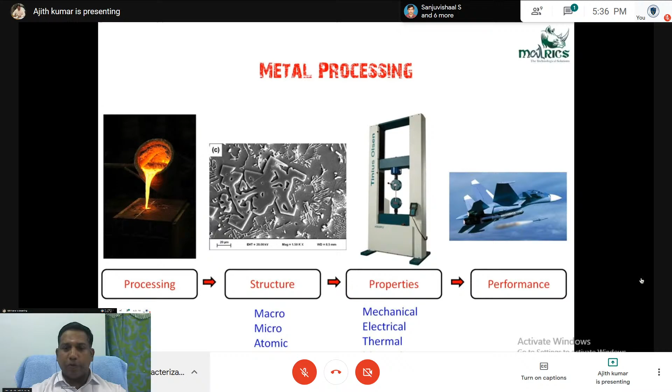And for the example or case study purpose, I'm using some of my PhD work and some of my papers' work in this entire talk.

We can classify materials into three categories: metal, ceramic, and polymer. A composite is composed of two or more individual materials from categories like metal, ceramic, or polymer. If you add some ceramic particle into the metal matrix, we call it metal matrix composite or MMC. Adding metal particle to a ceramic matrix gives a ceramic matrix composite. Some researchers add a small amount of metal powder to polymer, and that kind of composite is called polymer matrix composite. So by changing the combination, we are changing the matrix composite.

Metals, in the periodic table, about 76 of them are metals. If you define metal, it will vary with respect to the profession. A chemist calls an element a metal if its oxide dissolved in water gives an alkaline solution.

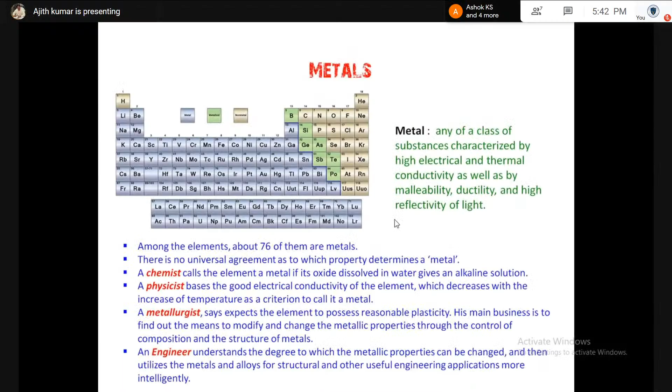So, defining a metal, it will vary with respect to different profession. A physicist bases it on how good the electrical conductivity of the element is, which decreases with increase of temperature as a criterion to call it a metal. Metallurgists say if you add some element or particles, how the material properties or metallic property is changing, how we are controlling the composition, that is called metal. But from the engineer's point of view, it's how we are utilizing that substance or product.

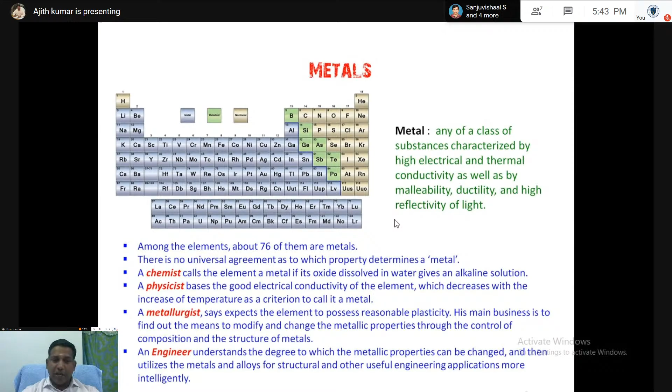And what it is made up of. So he always thinks about what is the use of that, what is its property. With respect to its property, he calls it metal or something.

So in general, metal is any class of substance characterized by high electrical and thermal conductivity, as well as by malleability, ductility, and high reflection of light.

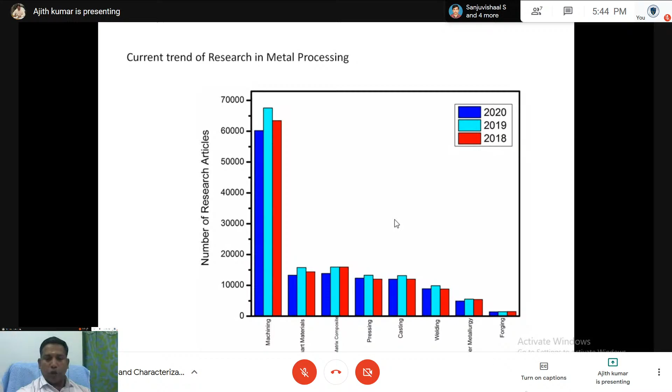And in processing wise - machining, smart materials, metal matrix composite, pressing, casting, welding, powder metallurgy, or forging - about 10,000 high-end impact factor papers are coming every year. So the research ground is open to all researchers, and moreover in the casting area, about 12,000 papers are coming every year.

So we can classify metal into two different categories: one is alloy, another one is composite. Alloy is a metallic solid formed by an intimate combination of a metal with one or more other metals or non-metals, but it has metallic properties. Composite is a material with at least two constituent parts, one being a metal necessarily, the other material may be a different metal or another material like ceramic or intermetallic material.

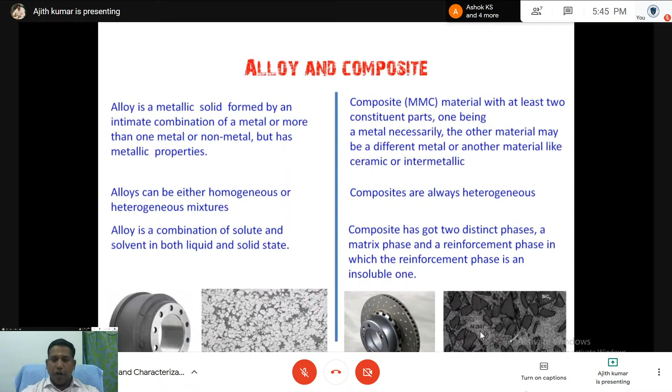Then we can classify metal into two different categories: ferrous and non-ferrous. Ferrous means the main constituent of the material is ferrite or iron. In non-ferrous, something other than ferrite is the main constituent, then we call it non-ferrous metal. So ferrous we can classify into two categories: steel and cast iron.

Steel we can classify into two categories: low alloy steel and high alloy steel. In low alloy steel, there is low carbon, medium carbon, and high carbon steel. The high alloy steel we can classify as tool steel and stainless steel. Stainless steel has about 11% chromium. In the case of cast iron, we can classify into gray cast iron, ductile cast iron, white cast iron, malleable cast iron, and compacted graphite cast iron.

On the other side, non-ferrous alloys - that means if ferrite is not the main constituent, we call it non-ferrous alloys. Aluminum alloy, copper alloy, magnesium alloy, titanium alloy, refractory metals, super alloys, noble metals, nickel alloys, lead alloys, tin, zinc, and zirconium alloys - these are all the different non-ferrous alloys.

Again, if you come into metal matrix composite, we can classify into two major categories: ex situ composite and in situ composite. We know composite is a material with at least two constituent parts, one being a metal. In ex situ composite, we are adding the reinforcement externally - that means adding silicon carbide particle, boron carbide particle, or titanium carbide particle to the aluminum matrix.

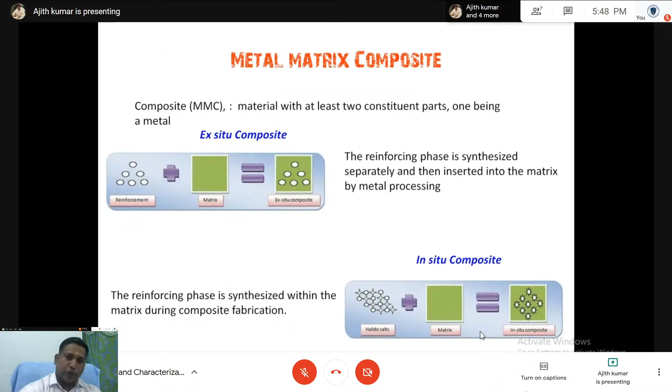We can classify composites into four different categories: particle reinforced composite, fiber reinforced composite, structural reinforced composite, and nano composite. We classify these with respect to the reinforcement.

The particle reinforced composite first type is dispersion strengthened composite, meaning nano size or submicron size particles are added to the metal matrix, improving strength and creep properties depending on the composition of metal and reinforcement. If larger particles, more than 500 micrometers, are added to the metal, we call it large particle reinforced metal matrix composite.

Fiber composites can be classified into two categories: continuous aligned and discontinuous aligned. Continuous aligned means the reinforcement runs through the entire product as a continuous rod. In the discontinuous type, like flakes, there is discontinuous aligned and randomly oriented composites.

The structural type is a laminated composite, mostly used in polymer-based composites, though some metal matrix composites are also made in laminated and sandwich panel types.

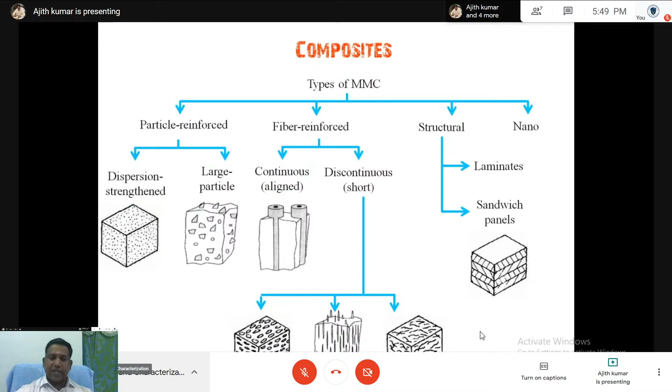Nano composite means the particle size is nano scale, so we call it nano composite. If you look at any composite, the main factor is the interface.

How the reinforcement and matrix are added together or bonded is called the interface. There is always an interface between the constituent phases in a composite material, and for the composite to operate effectively, the phases must bond where they join at the interface.

By experience we understand this, so sometimes we add a reactive agent to the matrix or reinforcement, creating a third ingredient to bond the reinforcement and matrix. That is the second type of interface.

The third type is when particles are added to the matrix and, either in situ or through reaction, interfaces form surrounding the particle. That is the third type of interface.

The interface strength and bonding always affects how the material property varies. Comparing composite and metal in terms of toughness, formability, joinability, and corrosion resistance, the metal is high but its strength is low compared with ceramic. So if we want to improve strength or high temperature withstanding properties, we add ceramic particles to the metal, altering the property to a higher level as per our need.

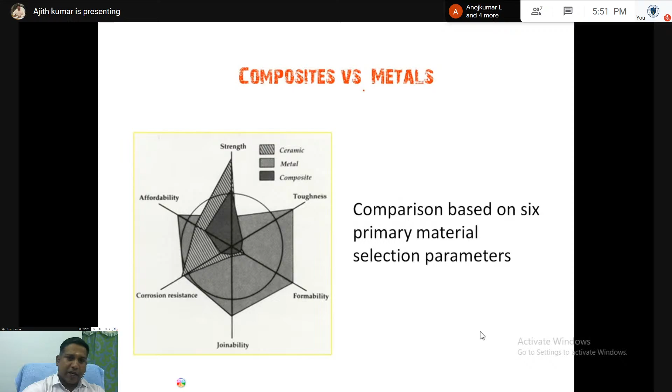Now an important concept: alloying. Pure metal generally gives less strength with high ductility, so if we want to improve properties as per our performance requirements, we do alloying. Alloying is a process in which two or more metal elements are melted together in precise combinations to form a specific material called an alloy.

Generally, we can perform alloying through metal casting and powder metallurgy, which is what we are going to see in this session.

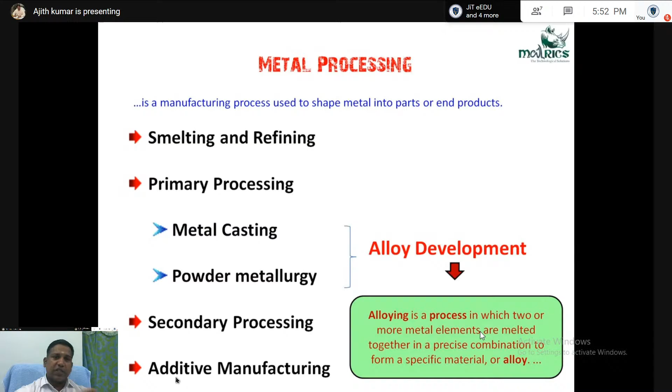The first step is smelting and refining: converting iron ore or aluminum ore, from ore to the ingot. From ore or scrap material, we melt it using a blast furnace or cupola furnace, then refine it from ore to pure ingot level. That is called the smelting level, the first step of metal processing.

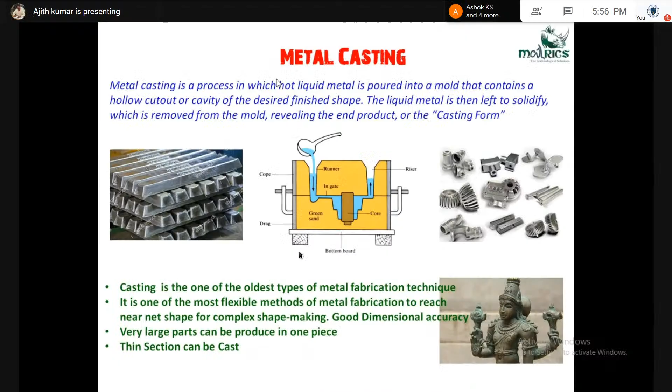Dr. Ajith, yeah—take your session.

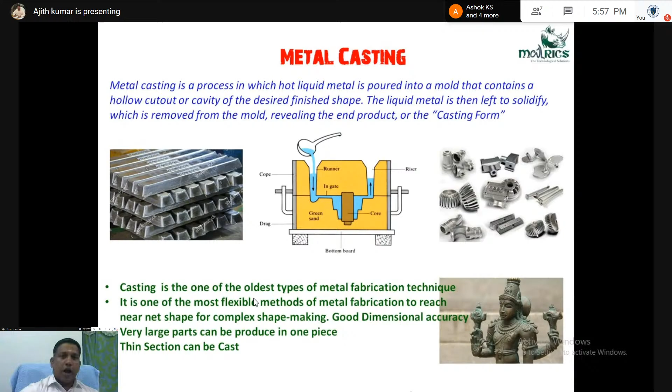Another important metal processing technique is powder metallurgy. This is a solid state route, whereas metal casting is a liquid state processing method. In the process, we have metal powders or metal lumps, or metal with ceramic lumps to make a composite.

First we mix using some ball milling or mixing machine to mix the sample powder. Then that powder is put into the mold and we do compacting. After compacting, that part or sample is put through for sintering. After sintering, we get the finished product.

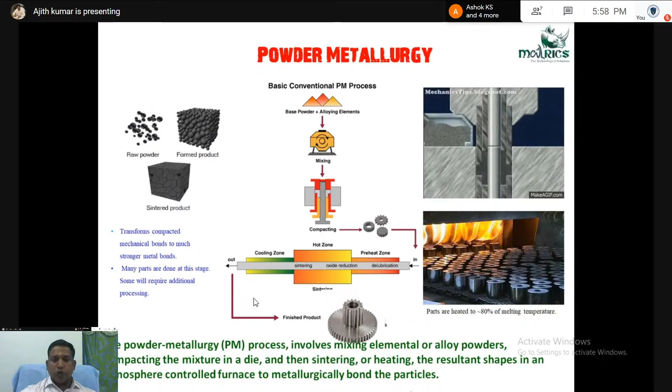The powder metallurgy process involves mixing elemental or alloy powders, compacting the mixture in a die, then it is sintered or heated. The resultant shape is heated in an atmosphere-controlled furnace to metallurgically bond the particles.

Advantages of powder metallurgy include virtually unlimited choice of alloys. In the case of metal casting, we can't do that for any metal - it's not possible for some refractory, high melting materials like tungsten, tantalum, molybdenum, titanium, whose melting temperature is about 3,420 degrees, so melting and casting is very difficult. For this kind of material, powder metallurgy is the best method to make a component or part.

Powder metallurgy offers very good material utilization, near net shape is possible, precision parts can be produced, and mass production is also possible in powder metallurgy.

In the powder metallurgy process, one of the important steps to make an alloy, meaning solid state alloying, is ball milling. Ball milling is a grinding method that grinds particles or lumps into extremely fine powder. During the ball milling process, the collision between the tiny rigid balls in a concealed container generates localized high pressure - this is mechanical alloying.

We already discussed alloying - alloying means mixing two metal elements and making a new alloy. By liquid metallurgy it's easy, because in liquid metal, liquid aluminum, if you put some cerium lump, it will immediately mix with the aluminum. We can make aluminum cerium alloy or aluminum silicon alloy. But in the case of solid state, we are using ball milling.

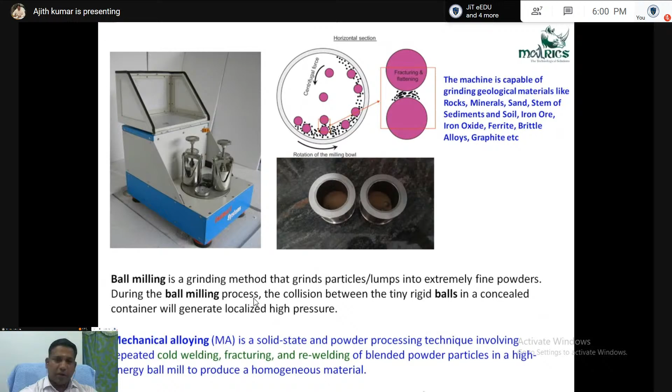In the mechanical alloying method, it's a solid state powder processing technique involving repeated cold welding, fracturing, and rewelding of blended powder particles in a high energy ball mill to produce a homogeneous material. This machine is available in our industry. We use it for grinding geological materials like rocks, minerals, sands, sediments, soils, iron ores, iron oxides, ferrite, brittle alloys, graphite, and other metal powders. These bowls and balls are made up of tungsten carbide.

The second one is secondary processing. After the primary processing like metal casting and powder metallurgy, we go for secondary processing. There are a number of secondary processing categories like forming, machining, joining, labeling, and mounting. Every secondary processing will alter or change the structure of the material - if you see the microstructure after and before secondary processing, it will vary, and even atomic level it will vary. So if you want to improve the property or change the shape, we use secondary processing methods.

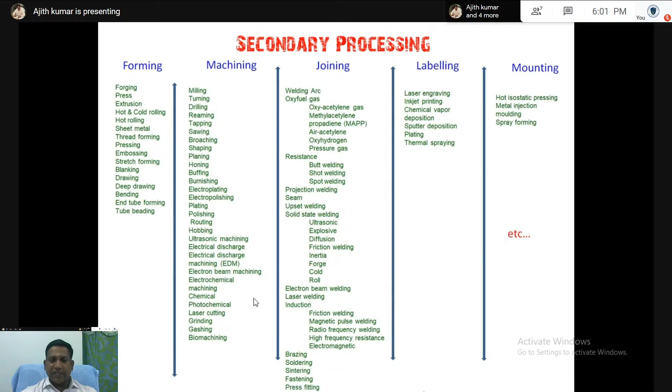In some categories, just by heat treatment we can improve the property, we can improve the grain size, and all these methods come under secondary processing. General secondary processing methods like forging, rolling, ECAP, extrusion, and drawing are there. By these methods, we can improve strength property by grain refining.

Another new method is additive manufacturing. Additive manufacturing is the process of joining material to make objects from three-dimensional model data, usually layer by layer - this is 3D modeling. Here we use liquid metal, or generally we use polymer material. In general printing, we print in 2 dimensions, X and Y. But in the case of 3D printing, we have the Z direction also.

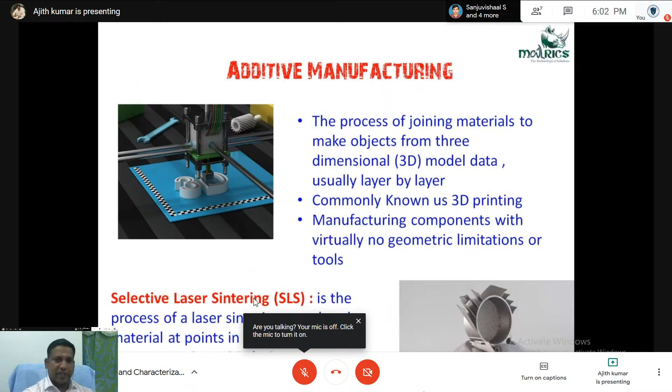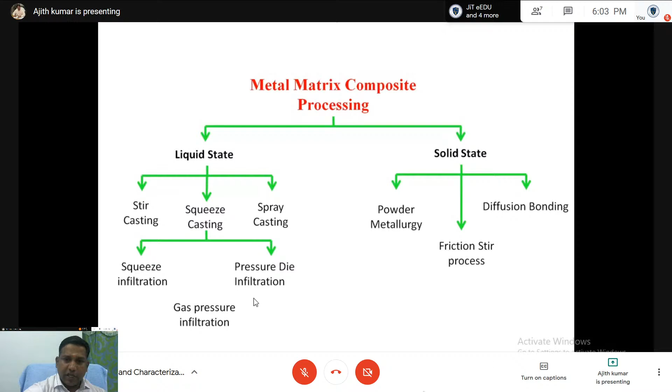Earlier we discussed the different types of metal matrix composites. Now let's look at how we process metal matrix composites. There are two different methods: liquid state processing and solid state processing. Liquid state processing includes stir casting, squeeze casting, and spray casting. Solid state processing includes powder metallurgy, friction stir processing, and diffusion. This is the basic composite making method.

Liquid state processing: this is the stir casting method. We have a crucible in which we melt the material, like aluminum or magnesium, above its melting temperature. Then, during mechanical stirring, we put a stirrer with a motor, running about 1000 to 1500 rpm. If you stir it, you get a vortex. In the vortex, if you put some ceramic particles, they will mix homogeneously, though some heterogeneous mixture will also come into the picture. Then, if you pour it into the mold, you get the composite.

The second method is infiltration. For the infiltration method, we have ceramic preforms. On the ceramic preform, we pour liquid metal, and using a press, we press it so that the liquid metal infiltrates into the ceramic preform, giving us the composite.

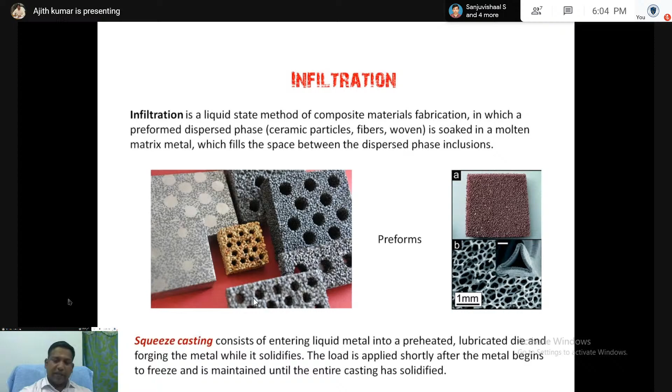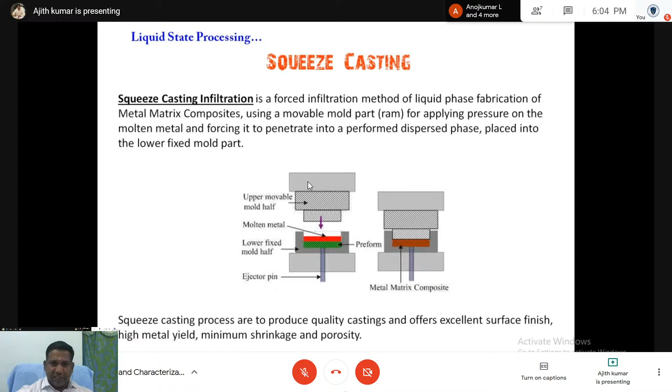Another method is gas pressure infiltration. Instead of a press, we use gas—high pressure gas, such as nitrogen, depending on the metal. If you apply pressurized gas to the container, the pressure causes the liquid or molten metal to infiltrate into the preform, giving us the composite.

Another method is pressure die infiltration. If you want a component like small gears or small parts, we fix the ceramic preform in a cavity. Using a plunger, the molten metal fills into the preform, and we get the composite material.

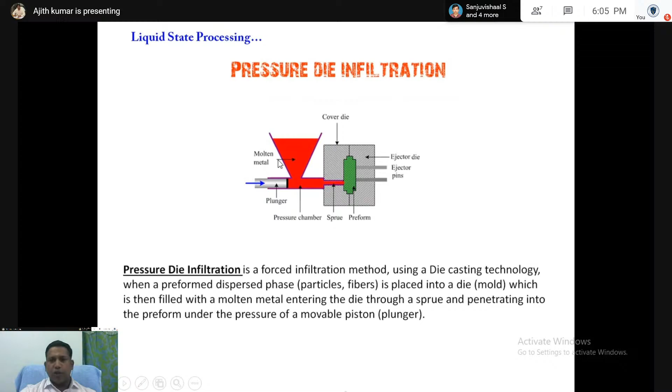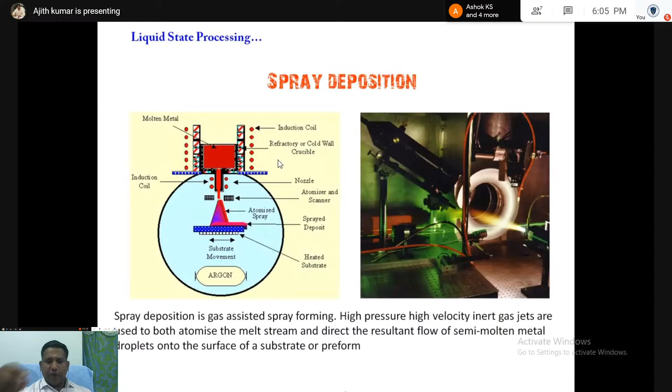This is the spray deposition technique. In spray deposition, a preform is present, and liquid metal is sprayed onto it. Due to the high pressure spray, the liquid metal infiltrates into the preform, and we get the composite.

Another category is solid state processing. Earlier we discussed liquid state composite processing; now this is solid state processing, which we've already discussed using ball milling or mechanical alloying. For example, with aluminum and silicon carbide particles, if you have aluminum lumps or pieces along with silicon carbide particles, you put both into the ball milling setup and mix them for about an hour, or vary the time as needed, to get mixed powders. After that, if you press or compact it and then sinter or heat it, you get the component.

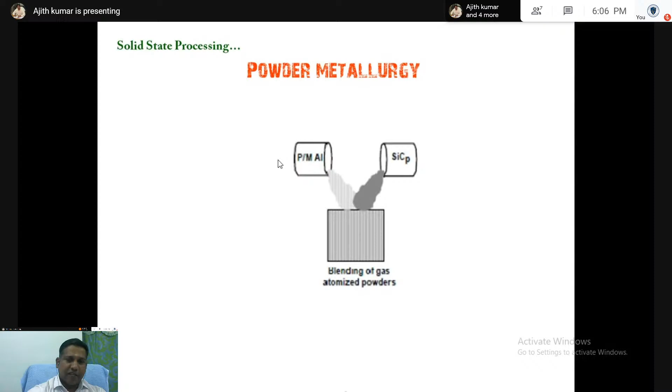Then there's diffusion bonding. In diffusion bonding, a fibrous material and a metal foil are present. If you press it, the metal infiltrates into the fibers, and we get the composite.

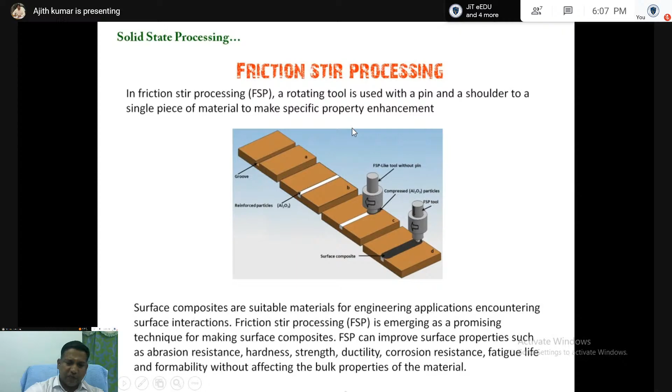Then there's friction stir processing, which is a selected area composite making process. A friction knob is used. If you want a composite in a particular area—say the white region—we first make a groove. In the groove, we put the ceramic or reinforcement particle we want. We fill that particle in, and then, using the rotating knob, we perform friction stir processing. This way, we can make the composite in a particular selected area.

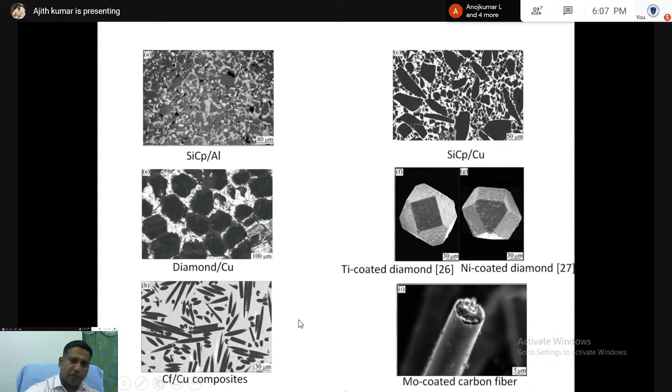So now we will go for light alloys. Light alloys - why are light alloys important? What is the need for that? Day by day the fuel price, like petrol, diesel, gas price, is increasing, and more vehicles are coming day by day. Due to that, more amount of CO2 emission is coming to the atmosphere. So to reduce the CO2 emission and to reduce the usage of fuel, one of the best ways is to reduce the vehicle weight. Weight reduction is one of the most important objectives of the aerospace and automobile industry.

Every 10% of weight reduction in a vehicle increases about 6 to 8% of fuel efficiency, and corresponding reduction of about 17 to 20 kg of CO2 emissions per kg of weight reduction over a vehicle lifetime. 100 kg represents a fuel saving of about half a liter per 100 kilometers for a vehicle. Minimizing every gram of weight of components of a space shuttle is even more significant.

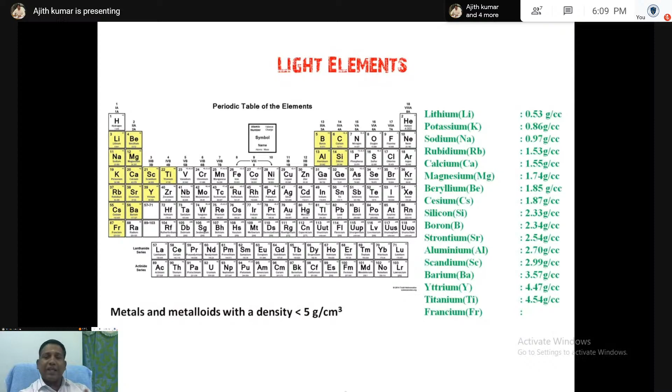So if you see the light elements in the periodic table, these are all light elements like lithium, potassium, sodium, rubidium, calcium, magnesium, and so on. But we can't use all the light elements to make structural materials. Some of these elements are metals, and the light metals are called so because of their low density. So low density metals are light metals.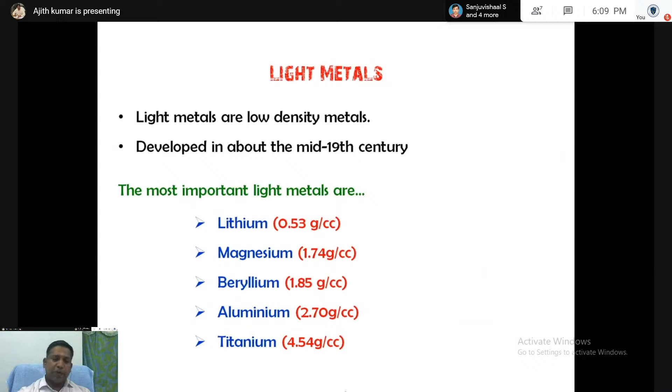These light metals were developed in the mid 19th century. Lithium, magnesium, beryllium, aluminum, and titanium are the most important light metals.

Lithium is a highly reactive and flammable material, and must be stored in mineral oil. Lithium reacts with water easily. We can use lithium in rechargeable batteries for mobiles, laptops, digital cameras, and electric vehicles. Lithium oxide is used in special glasses, heat resistant glasses, and ceramics.

Another one is beryllium. Beryllium is a low density material, with about 1278 degree melting temperature, so its high temperature withstanding capability among light materials is high. We can use beryllium in aerospace and nuclear industry, satellites and antenna booms, heat sinks with thermal management properties, and supersonic transport aircraft. We use beryllium because of its high temperature properties. However, it is very costly to mine and extract, has low ductility at ambient temperature, and is extremely toxic.

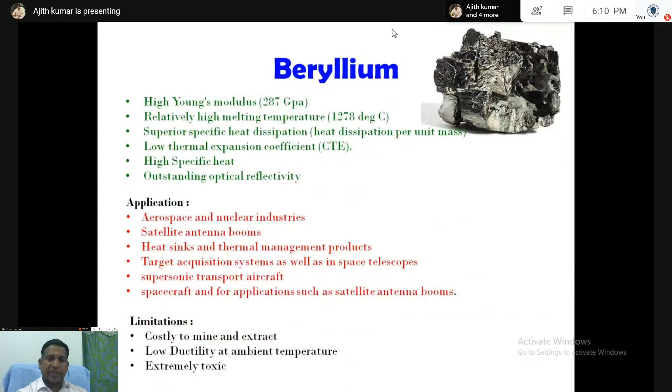Aluminum is the second most plentiful metallic element in the earth, and it's estimated that 8.3% of the earth's crust is composed of aluminum. It is very soft, malleable, and ductile. It is a very good conductor of heat and electricity, and it is a non-magnetic substance. We use aluminum every day - its applications are numerous. Most aluminum is used in construction, ranging from aluminum foil for food packing to structural members in the aircraft in which we travel. So that is how huge an area we use aluminum in.

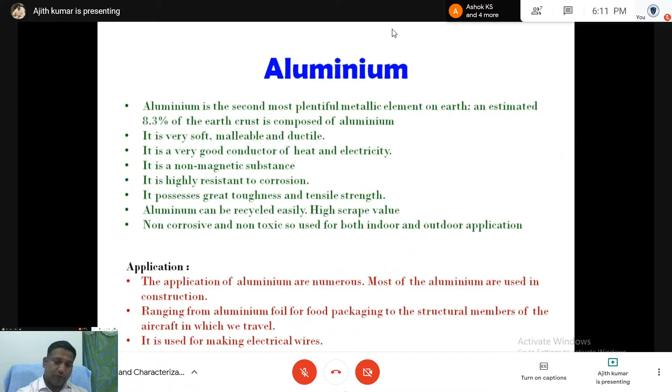Titanium is the strongest and most durable metal on the planet. Titanium has the highest strength to density ratio of any metallic element on the periodic table. Titanium alloys are used in aircraft, ships, spacecraft, missiles, and in steel alloys to reduce grain size, and as a deoxidizer. Its limitation is that it is difficult to cast. Unlike iron or aluminum which we can easily cast, titanium casting is very difficult and more expensive.

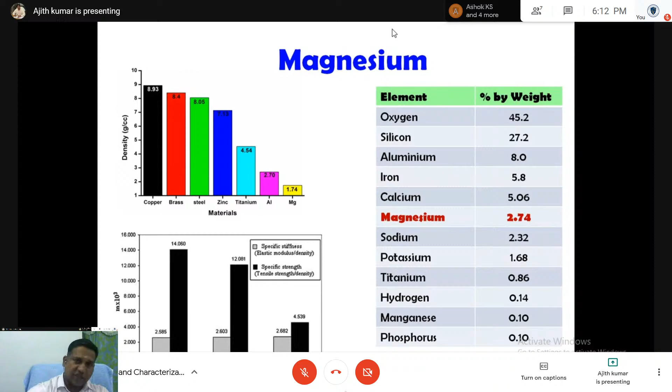In between these comes magnesium. Magnesium has a density of 1.74. If you see all the structural materials, not just light metals but all structural metals, magnesium is the lowest density structural material, about 1.74 gram per cc. In the earth's crust, it is the 8th most abundant element, composing about 2.74% of the earth's crust. If you consider its specific stiffness and specific strength, these properties are high in magnesium - meaning high specific strength and specific stiffness. More than that, it has superior damping property, excellent castability, is highly recyclable, has good machinability, and good weldability under inert atmosphere.

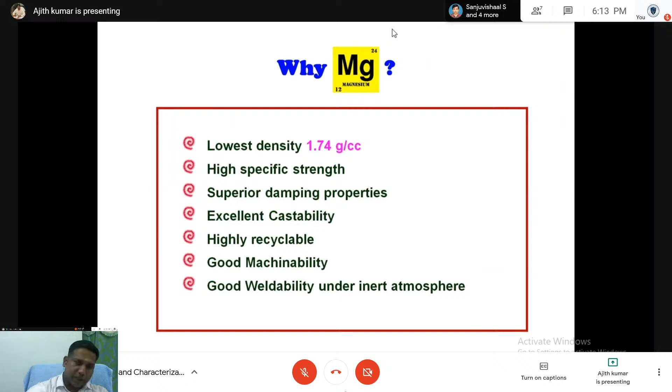Application of magnesium is nowadays very vast. Most of the automobile parts and automobile devices use magnesium. About 70.8% of magnesium we are using in the automobile sector, and also in sporting goods, power tools, industrial machinery, energy equipment, computer and electronic products, and other products. And in recent high-end cars, we are using magnesium.

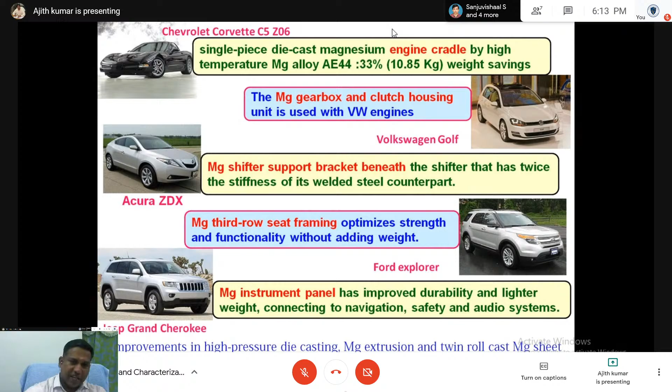About 10 kg to 80 kg of magnesium we are using, and day by day magnesium research is growing. You can see in Chevrolet, Volkswagen, Acura, and Ford, all these car companies are ready to use magnesium because of its lightweight and higher strength to weight ratio.

If you see the literature, day by day magnesium research is coming into a good position. Year by year you can see growth - in 2018, about 2,768 journals were published in the core magnesium area. A lot of research is nowadays coming in magnesium-based alloys and magnesium-based composites.

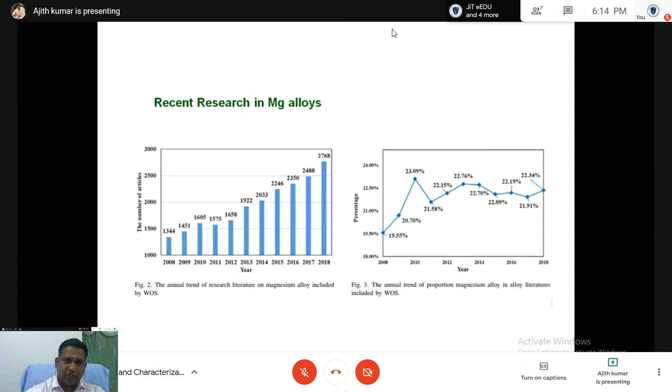We can classify magnesium alloys into two categories: aluminum-containing magnesium alloys and aluminum-free magnesium alloys. With respect to composition, we use coding for magnesium alloys, such as AZ91, which means 9% aluminum and 1% zinc in the magnesium - that is AZ91 magnesium alloy. Every coding follows a similar pattern. AE42 means 4% aluminum and 2% rare earth. That is AE42. Now we will move into material characterization.

In this material characterization session, we discuss material characterization with real research data. For better understanding, I am going to show you some PhD research thesis data and some papers' data.

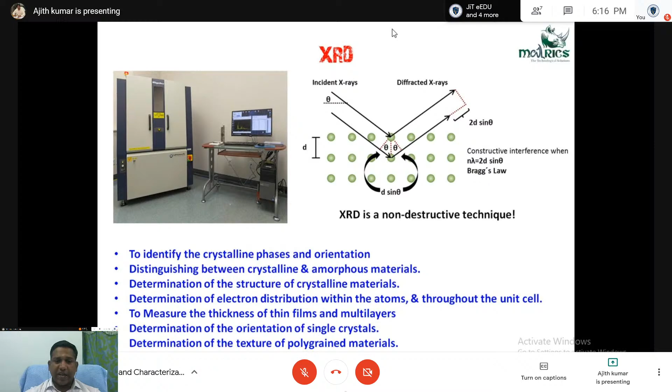After the processing - that means after metal processing like metal casting, powder metallurgy, or 3D printing - the first characterization technique is XRD. From XRD, we can find out what different phases are present in the metal. Not only that, we can distinguish between crystalline and amorphous material, determine the structure of crystalline material, determine electron distribution within the atom and throughout the unit cell, measure the thickness of thin films and multi-layers, determine the orientation of single crystals, determine the texture of polygrained materials, and measure strain and small grains, etc. - all using XRD.

The second technique is chemical analysis. What is the composition of a particular metal piece - that we can understand through chemical analysis, that is wet chemical analysis. Wet chemical analysis can be classified into qualitative and quantitative chemical analysis. Then there's optical emission spectroscopy, from which we can get bulk elemental analysis. So if you cast an aluminum, magnesium, strontium, silicon alloy, what composition you reach - that we can check using optical emission spectroscopy and inductively coupled plasma spectroscopy.

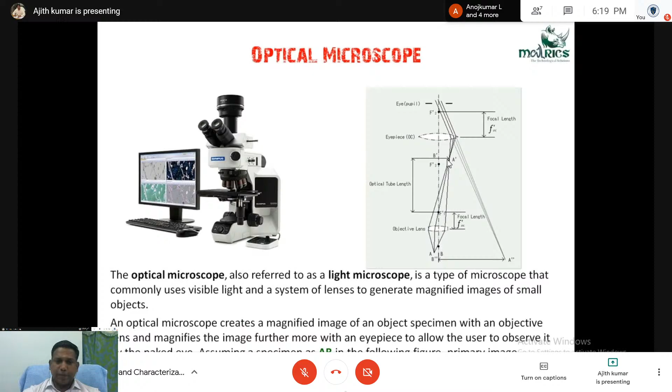The optical microscope is easily available. We can see the entire structure and phase difference using this optical microscope. It is a light microscope, working on a light method - that is the mechanism of this light microscope or optical microscope. There are some lenses. AB is the sample, meaning the focusing area. By using focal length variation, we can get A' B', that means a magnified image, using this optical technique.

And for microstructure analysis, we need to do polishing, because as we already discussed, this is light microscopy.

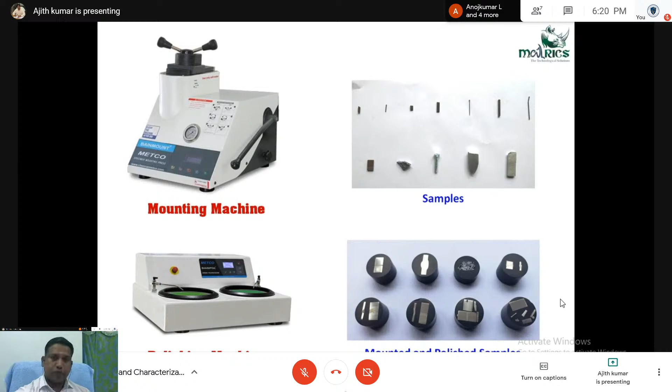Another one is the scanning electron microscope. In optical microstructure, we can see about 5x to 150x magnification. If you want more magnification, to see nano or submicron particles, we need other microscopes like the scanning electron microscope or transmission electron microscope. From SEM, we can see from 5x magnification to provide high quality depth of field images. SEM micrography is an effective tool in failure analysis, contaminant analysis, and general microanalysis.

Failure analysis means after fracture, after pre-fracture, or after fatigue fracture, we can analyze the fractured surface using SEM - whether it is a brittle fracture or ductile fracture, that we can understand from the scanning electron microscope. For irregular shaped surfaces, like after wear testing, if you see the structure of that sample, we can understand the mechanism of its wear. Then there's transmission electron microscopy.

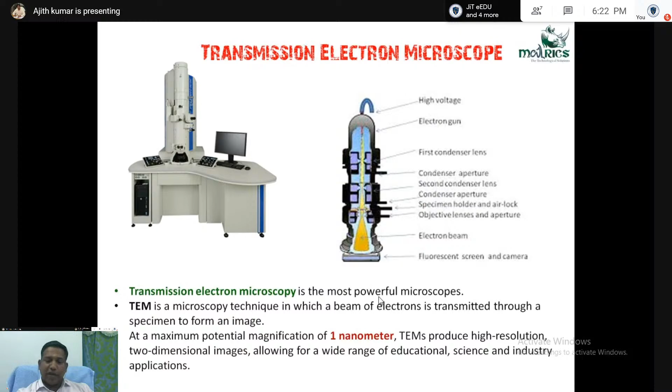Transmission electron microscopy is the most powerful microscope. TEM is a technique in which a beam of electrons is transmitted through a specimen to form an image, so at nanometer scale or lattice level we can see that. There are 4 different applications of TEM: conventional TEM, in situ TEM, analytical TEM, and HRTEM. Conventional TEM is for nano-sized microstructure and morphology - small grain size, nano grain size, or orientation we can see using conventional TEM at nano scale.

In situ TEM means during the TEM experiment we can see the deformation, the environment - meaning corrosion - intuitively through video, and phase transformation. During heating, if you do in situ TEM, you can get the phase transformation video.

Another one is analytical TEM. In a TEM image, when we have some dots or needle kind of structures, we can check what that phase contains using analytical TEM - it will show the composition. Another one is HRTEM. From HRTEM we can understand lattice imaging, the structure of complex materials, and the atomic structure of defects.

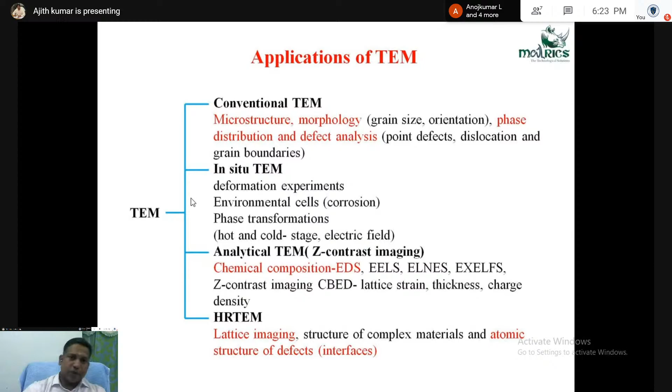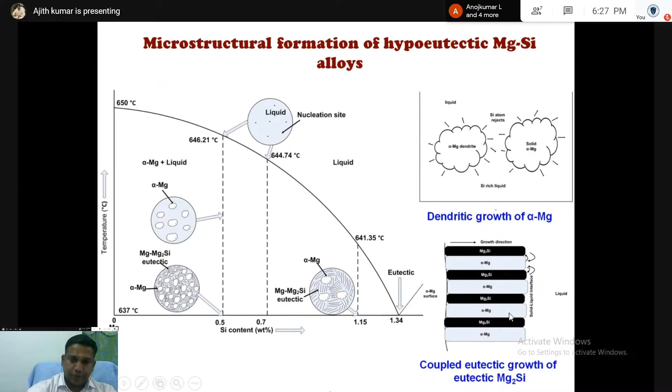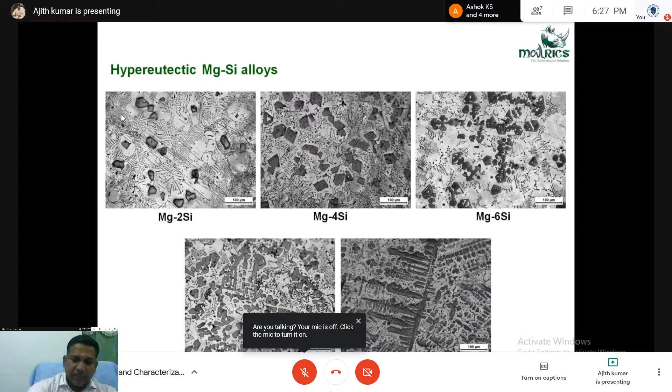Then we checked it using SEM, scanning electron microscope. You see that the black color region is primary Mg2Si, which we understand using SEM EDAX analysis, that means point EDAX analysis.

From the point, it is 65.73 atomic percentage magnesium and 34.27 atomic percentage silicon. That means 2:1 magnesium and silicon ratio. So we are calling it Mg2Si. So this phase is Mg2Si, confirmed using SEM microscope and EDAX analysis. Then again, after that white region in the microstructure, some different phases are there.

The high magnification SEM picture we can see here. It looks like a Chinese script, so we call this structure the Chinese script structure. This is a eutectic microstructure.

So all of these structures form during the solidification, and we can see now how the structure changes during solidification. In 6% silicon addition, we can assume the melt temperature is about 800 or 850 degrees.

After melting, when you start solidifying at 794.47 degrees, the first part formed is Mg2Si, meaning primary Mg2Si will start. Then step by step it will grow like a polygonal type of structure, taking silicon from the outer region, so the surrounding region becomes silicon free.

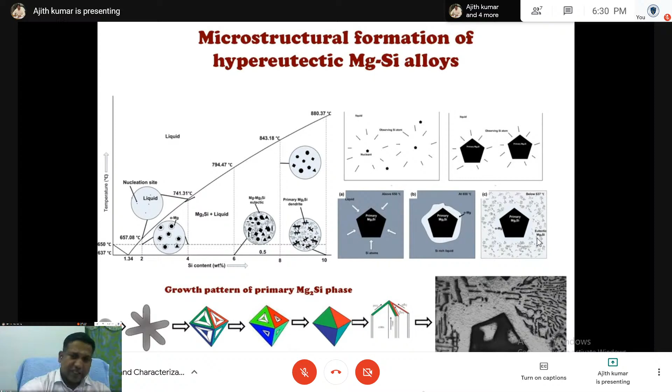So when that surrounding region reaches 657.08 degrees, immediately alpha Mg will form, with the remainder still in liquid condition. When it reaches 637 degrees centigrade, immediately that eutectic Mg2Si will form like a Chinese script or needle kind of structure, as we discussed in the SEM microstructure.

Now, after this analysis, we understand that there are two different kinds of structure: hypoeutectic and hypereutectic structure. In the hypoeutectic structure, there is a lamellar kind of alpha Mg and eutectic, line by line kind of Mg2Si eutectic structure.

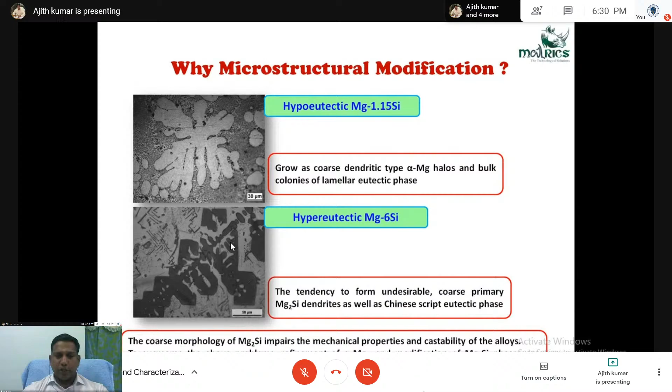In the case of hypereutectic, there are three different structures: one is primary Mg2Si, the white region is alpha Mg, and this is Chinese script eutectic Mg2Si. So this coarse morphology is the reason for reducing its properties, because of this coarse morphology the tensile property is reducing. So if we modify this property, we can improve it.

From the literature, we understand there are different modification methods like hot extrusion, reciprocating extrusion, rapid solidification, mechanical alloying, solution heat treatment, semi-solid material processing, melt superheating, electromagnetic vibration, and modification by alloying elements. These are different modification methods for magnesium silicon alloys to modify the structure and improve the mechanical or other properties.

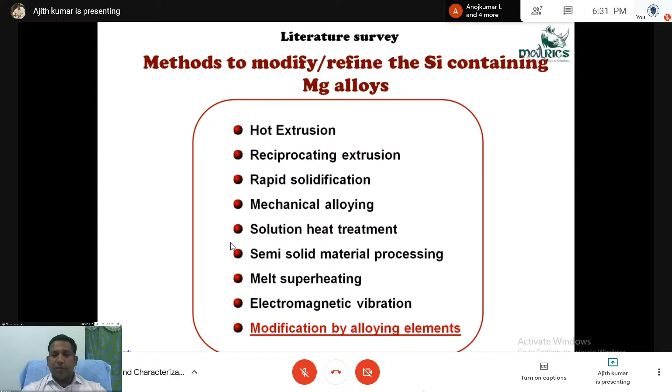So one of the important modification methods is modification by alloying elements. In our thesis, we chose 4 different elements: misch metal, neodymium, calcium, and strontium. We checked these 4 elements in 2 different alloys, one is magnesium 1.15 Si alloy and another is magnesium 6 Si alloy, to analyze how the microstructural changes come and what is the reason.

I'm just showing only one addition, that is neodymium addition. With the addition of neodymium, you can see the coarse lamellar structure changes to a discontinuous lamellar structure at 0.3% ND and 0.6% ND. With different additions, you can see variation in microstructure.

In the high magnification views of the lamellar eutectic structure, the lamellar spacing becomes very fine, and at 0.9% ND addition there is no lamellar or line kind of structure; all the structures look like particle kind of structure. When it reached 1.2% ND addition, we got some star kind of compound in the matrix or interdendritic region, which we analyzed using SEM.

SEM does this analysis, called SEM mapping. From the SEM mapping, we can understand that this area is magnesium free—there is not much magnesium here—and the white region, this portion, has silicon and Nd. From that analysis, we understand that this phase is Nd silicon, and by point analysis and point EDAX analysis.

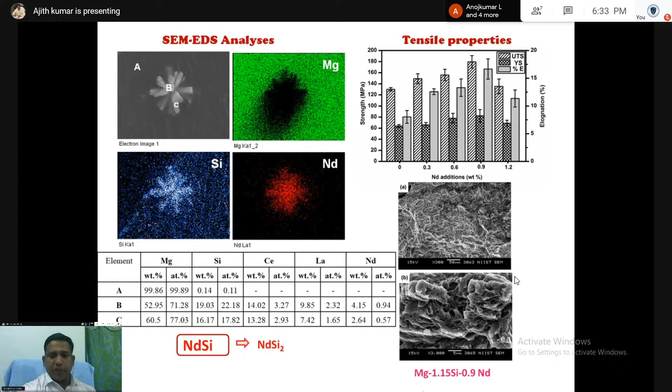We understood that phase is the Nd Si2 phase. With respect to the addition of neodymium, the property is varying, and this is the fractograph before modification, meaning unmodified, and the modified alloy fractograph.

How the modification happened, we can discuss: in the initial stage, in the crucible or the mold, all the metal is in liquid state. When it starts solidifying, initially some nucleants will be there. That nucleant will grow together and form a dendritic kind of structure. So we need some nucleants.

So when we add alloying elements like neodymium, the number of nucleants is high. Simultaneously, more dendritic alpha Mg will grow in all the places, so there are more interdendritic regions. In between the interdendritic region, eutectic Mg2Si will form.

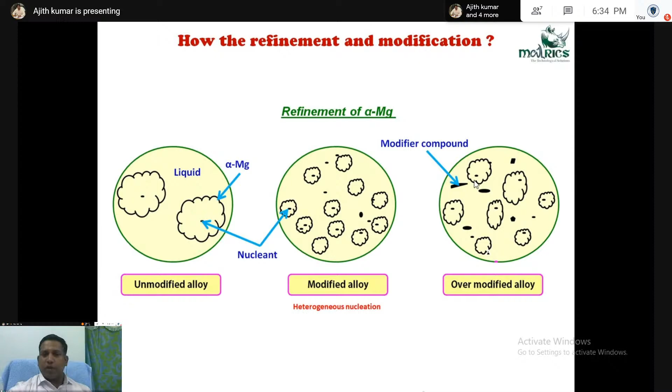So when we add 1.2%, that means more neodymium, that neodymium itself forms a compound, meaning NdSi2. Then it will not give any modification effect, which we call an over-modified alloy.

At the same time, how the needle kind of structure, the Chinese script kind of structure, or the lamellar kind of structure changes to a dot type of structure—how the modification happened—is due to the poisoning effect and impurity-induced twinning mechanism. During the eutectic solidification, this red atom is the neodymium atom; this atom will restrict the growth and cause discontinuity.

So these are, with respect to different element additions, different microstructures you can see. And with respect to its microstructure, the tensile property is also varying.

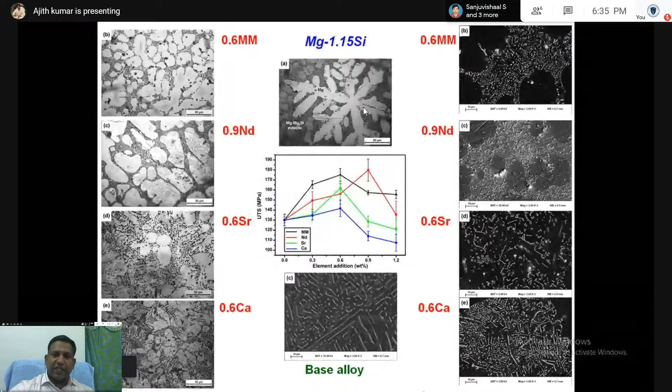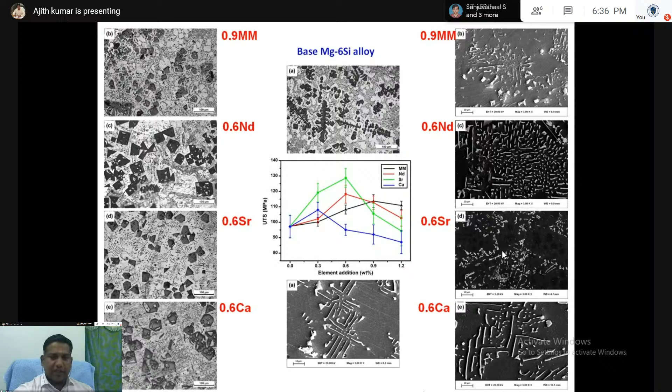Then we can go for mechanical testing. In the mechanical testing side, hardness, tensile, compressive, fatigue, creep, toughness, and torsional behaviors are there. First, we will see hardness testing.

Hardness is a measure of a material's resistance to localized plastic deformation, such as a dent or scratch. Different types of hardness exist: Brinell hardness, Vickers hardness, Knoop hardness, and Rockwell hardness. With respect to the probe or indentation mark, we can classify these different categories.

There are three different hardness testings: macro hardness, micro hardness, and nano hardness. Macro hardness means we can see the indentation by naked eye. Micro hardness means we can check the hardness of a particular phase—one phase of about 100 micrometer size—so we can identify the hardness of three different phases in a material. Again, nano hardness is used if you want to check the hardness of submicron size or nano particles.

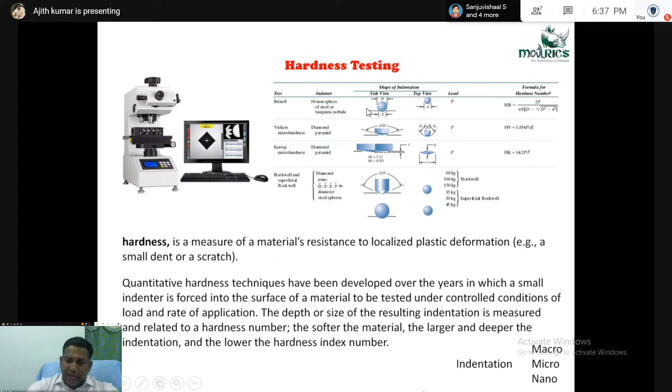We can use the nano hardness testing machine for that. So this is an example: with respect to silicon addition, the hardness value is increasing. And if you see the micro hardness, alpha Mg micro hardness is very low, about 36 or 37 HV Vickers hardness.

But in the case of primary Mg2Si, this is the same alloy, meaning the same microstructure—we are taking different hardness readings at different places, so we are indenting in different places.

Same metal, same places, same surface, but different places we are indenting. The first place is the alpha Mg phase. In the alpha Mg phase, the hardness is about 37 HV. Then in the eutectic region, it is about 58 to 70 in that range.

If you check the hardness of primary Mg2Si, you can see a polygonal kind of indentation mark, and at all the corners we can see some cracks. This is because this material is highly brittle. Due to that brittleness, when you indent on the particular face, it cracks like glass. So from this analysis, we understand that the breaking is happening due to the indentation mark, because of the highly brittle Mg2Si particle.

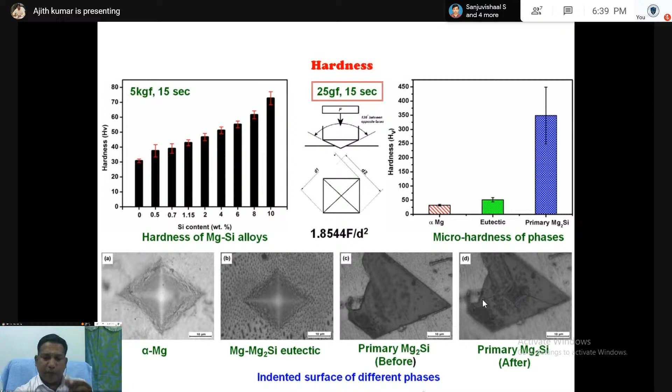So if you increase the Mg2Si phase in the particular material, the property will always reduce. So the polygonal shaped Mg2Si should always be kept small. Only then can we improve the strength property.

Then tensile testing. From the tensile test we can understand ultimate tensile strength, breaking strength, maximum elongation, and reduction in area. These are the tensile testing samples, which we are also making in our laboratory. From this tensile value we can get the Young's modulus, Poisson ratio, yield strength, and strain hardening capacity.

Creep is a plastic deformation of the metal that occurs as a function of time at a constant load or stress. So creep is a time-dependent process where a material under an applied stress exhibits a dimensional change at high temperature. The process is also temperature dependent, and creep always increases with temperature.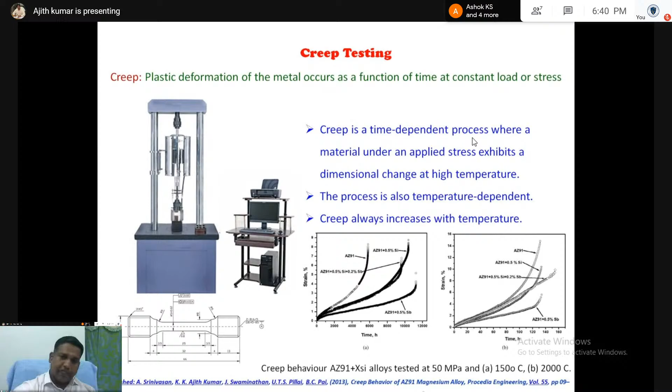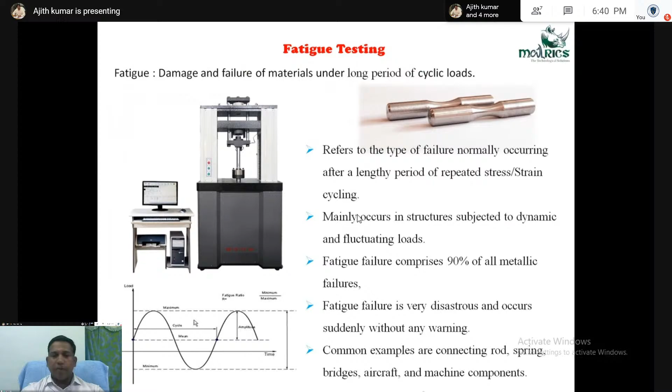Next is fatigue testing. Damage or failure of the material under a long period of cyclic load is called fatigue. Fatigue mainly occurs in structures subjected to dynamic and fluctuating loads. Fatigue failures comprise 90% of all metallic failures. Different types of fatigue exist: mechanical fatigue, creep fatigue, thermomechanical fatigue, corrosion fatigue, and fretting fatigue.

There are three stages in fatigue analysis: initial fatigue damage, progressive cyclic growth, and final sudden fracture. The first stage, initial fatigue damage, leads to crack nucleation and crack initiation. Then progressive cyclic growth of the crack continues until the remaining uncracked cross-section becomes too weak to withstand the applied load. Finally, sudden fracture of the remaining cross-section occurs.

So we can see, with the example of tensile property, with respect to silicon addition of 2 to 4%, we are getting good mechanical property.

Then we analyze the fracture tensile samples using SEM. From SEM analysis we understood there are cleavage kind of ribbon patterns, and in magnesium 6Si we see particle breakage. The primary Mg2Si breakage can be understood using this SEM analysis, and in the case of magnesium 10Si, we can see very long particle breakage. So the reduction in tensile property is due to the brittle Mg2Si particle present in the microstructure or in the material, and due to that, the failure is happening.

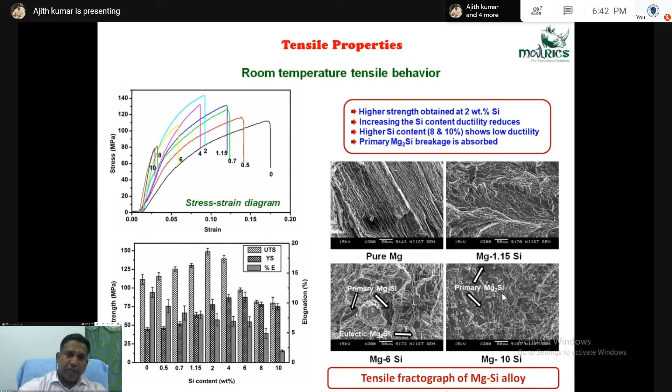Then we studied the elevated temperature tensile behavior. At elevated temperature also, 2 to 4% silicon shows good property, and we again analyzed the fractogram, meaning how the fracture happened. Higher silicon content alloys, that means 6 to 10%, show better yield strength.

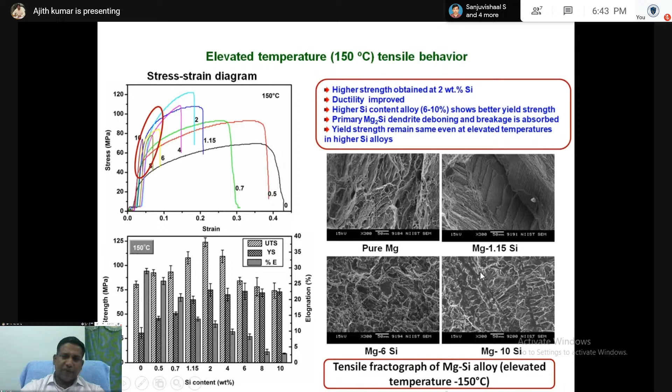Primary Mg2Si dendritic debonding and breakage is observed, which we can see in magnesium 10 as a dendritic kind of breakage. The yield strength remains the same even at elevated temperature in high silicon alloys. So we can correlate this tensile property with the fracture analysis, these fracture studies, to identify the reason for the tensile changes using these SEM images.

This is the compressive property. With respect to silicon addition, the compressive property increases. This small image is a sample after failure. In pure Mg, the compression effect is high. In the case of magnesium 10, there is no compression; sudden breakage occurs, but it withstands more compressive load. Even so, after that sudden load, sudden breakage happens, and there is not much ductility, which we can identify.

After that compressive testing, we did SEM analysis. From that SEM analysis, you can see these are shear bands. In pure Mg, the shear bands are very large.

When you add magnesium 1.15 Si, there are minimum small shear bands. In magnesium 10 Si, because of more primary Mg2Si particles, the shear bands are more, so it breaks immediately, but it shows more compressive property.

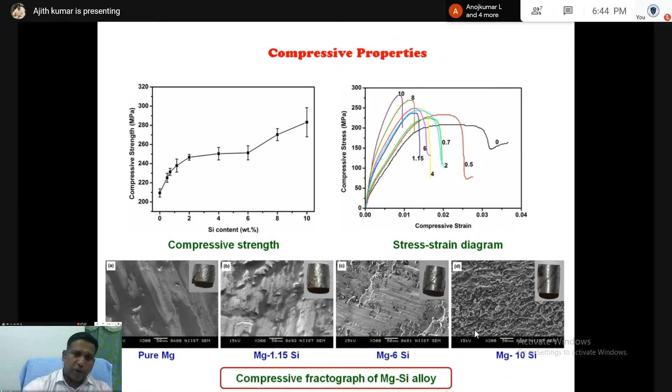In every wear test, if you see the sliding distance versus wear volume graph, initially A to B is transient wear, and after that B to C is steady state wear. We always take the steady state wear region for further analysis.

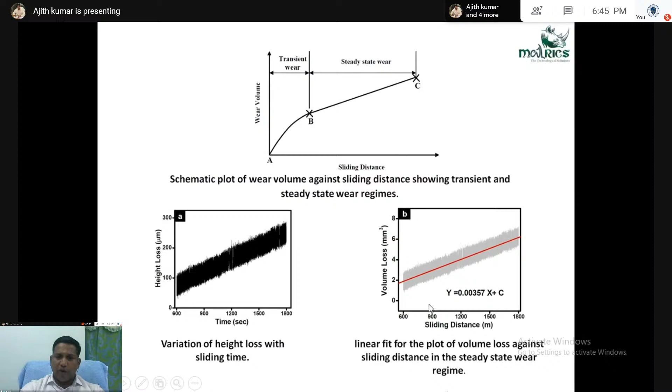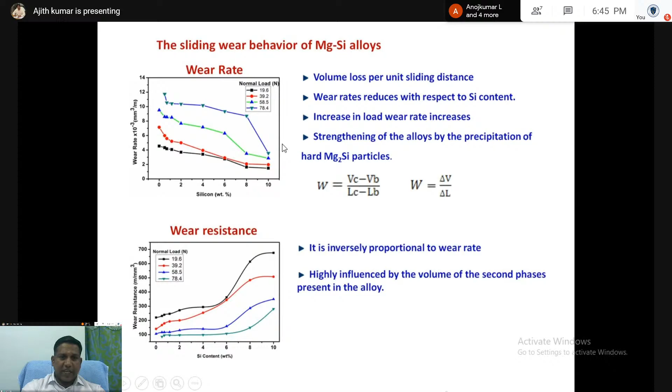In the steady state wear region, we take data like height loss versus time. From this graph we get the slope value of wear rate, which is the volume loss per sliding distance. With respect to silicon addition, the wear rate is reducing, so wear resistance is increasing.

Then we make a graph of specific wear rate, wear coefficient, and coefficient of friction using that data. After testing, we analyze the SEM of all the wear samples, both the worn surface and the wear debris.

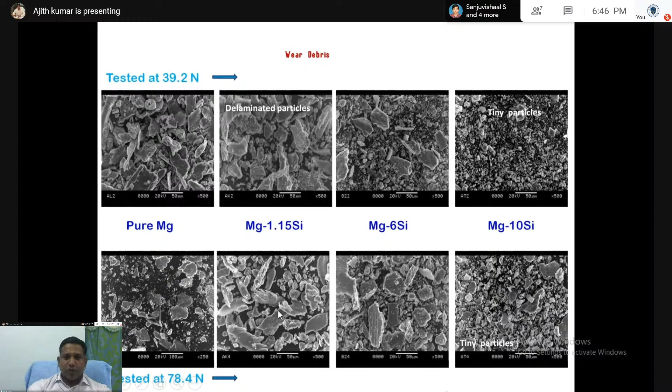In magnesium 1.15Si and 6Si, there are delaminated type of surfaces, and in the debris also we see delaminated kind of particles. So we understood that this kind of wear is delamination wear.

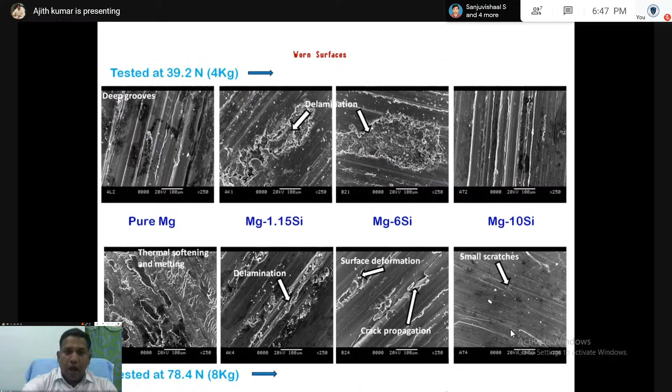In case of magnesium 10Si, there are very small tiny particles, and in the SEM image the line scratches are very small. Because of the hard Mg2Si particles present in the matrix, we are not able to make a deep groove, so very small scratches are there because it acts as a barrier for wear. So that we can confirm using wear debris.

So with this talk we understood that every secondary processing is changing the microstructure. So if you do some ECAP or pressing extrusion, the microstructure will change, and with respect to the microstructure we can alter the properties of the particular material.

And it always depends on how we are processing it: whether by 3D printing, metal casting, die casting, or powder metallurgy. With respect to that, the microstructure will change, and with respect to the microstructure we can alter the property. So every time an engineer checks the property against the expected performance, and for that performance what range of property is necessary. That property is always related to the structure of the material, which depends upon its microstructure, macrostructure, or atomic structure. So this we can conclude.

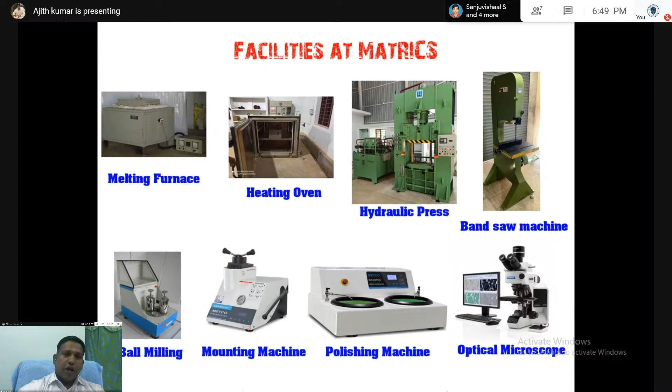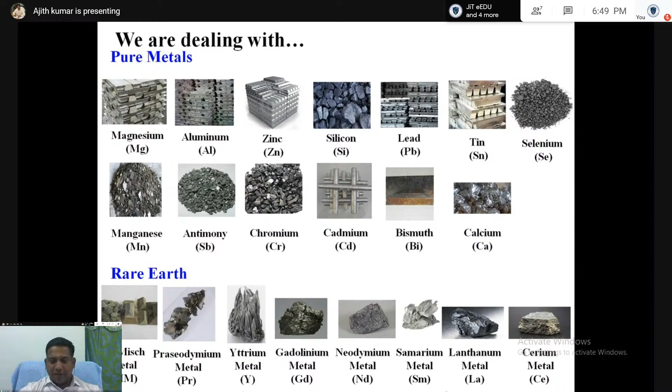These are the samples, but generally big industries won't sell in gram size, while we are giving them for researchers in gram size also, whatever necessary quantity is needed. We also provide master alloys like magnesium-aluminum master alloy, and ceramic powders like silicon carbide, black silicon carbide, boron carbide, titanium carbide, tungsten carbide, and all the master alloys. Not only master alloys, if you design an alloy and want to make any alloy, we are making it, and not only alloys but composites too we are making for researchers.